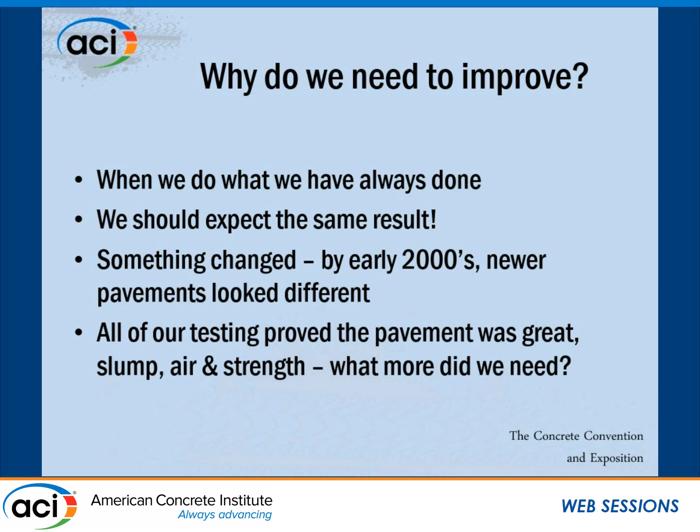Every slump test was in spec, every air test was in spec, and man, we nailed strength. We were 50% higher on strength on every single sublot. So we knew we had good concrete, right? What more do we really need? 2 or 3 years into the life of a pavement, we were starting to see these shadows develop. And we were going, what's going on here?

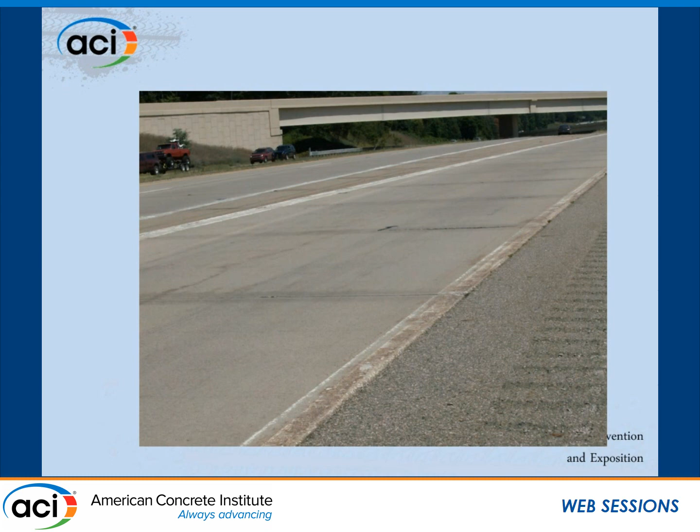What's happening? When I was traveling about a week ago, I was down in Orlando, and I noticed at Orlando Airport the same kind of shadows going on, okay? Now, obviously, in Orlando, they don't have the same problems we have in Michigan because there's something they don't have down in Orlando that we have here. It's a 4-letter word called snow.

But notice the shadowing on this joint versus the shadowing on this part of the joint. Why is it different? Well, a couple of reasons, but the main thing is this was probably a slip form pavement, and that was done by hand. So that just gives you a little tickler to think about as we go forward here.

So what's changed? Everybody talks about the EPA restrictions on the cement. New admixtures. We came up with these things called synthetic admixtures, so we can blame them for all of the problems in the world. A big one, the snow and ice policy changed. The departments and the local agencies went to a zero tolerance for ice and snow, so they started pre-treating, and these guys came out of the woodwork with some really neat, cool stuff.

Some brines out of the salt, out of the oil wells, and they would treat pavements on Friday on regular time because it was going to snow on Sunday on overtime. So they would pre-treat the pavements. So we were really trying new policies here. Cement fineness. Something's going on with the cement. We're getting 28-day strengths in less than 24 hours at times, okay? So we're really accelerating this process.

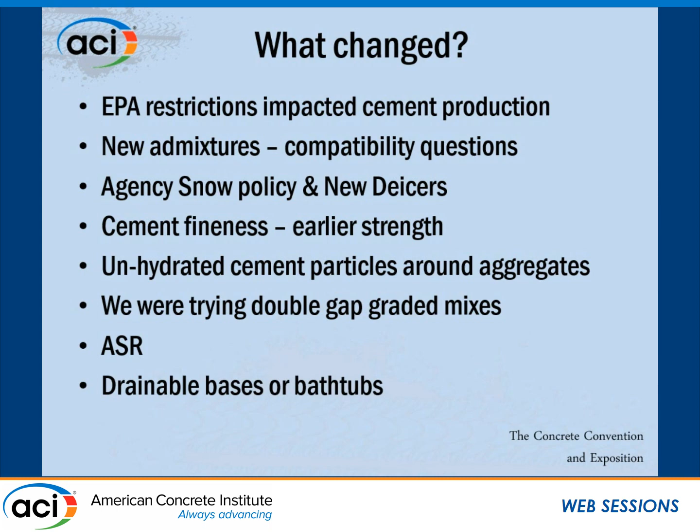We find in our reports unhydrated cement particles surrounding the aggregates. We are trying double gap graded mixes, right? Throw in some cyclopean aggregate so we don't have to use as much paste. ASR, that was a big buzzword. So we've realized that ASR did exist. And then we had drainable bases, we were making drainable base pavements. But were we really creating bathtubs to soak our concrete in, or did we really drain our pavements?

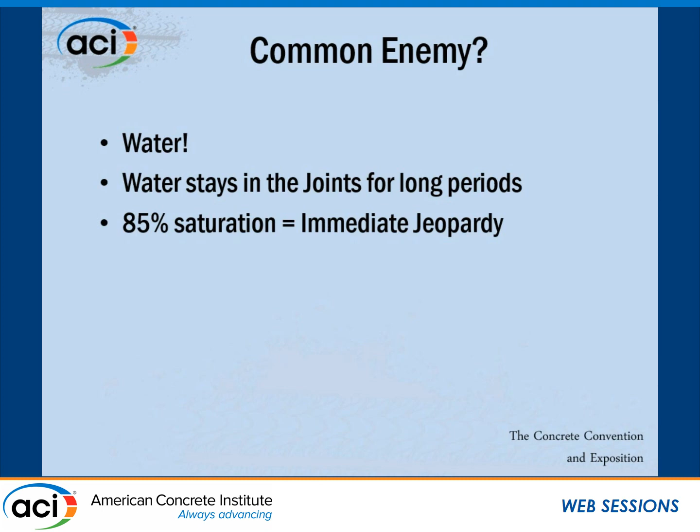So the common enemy that we have here in Michigan is water. It's our greatest asset, but our worst enemy. Water stays in the joints for long periods of time. And when we get to 85% saturation of the pavement slab itself, Jason Weiss, formerly of Purdue, now of Oregon State, has showed us that one freeze-thaw cycle gives you instant damage once you reach that saturation point.

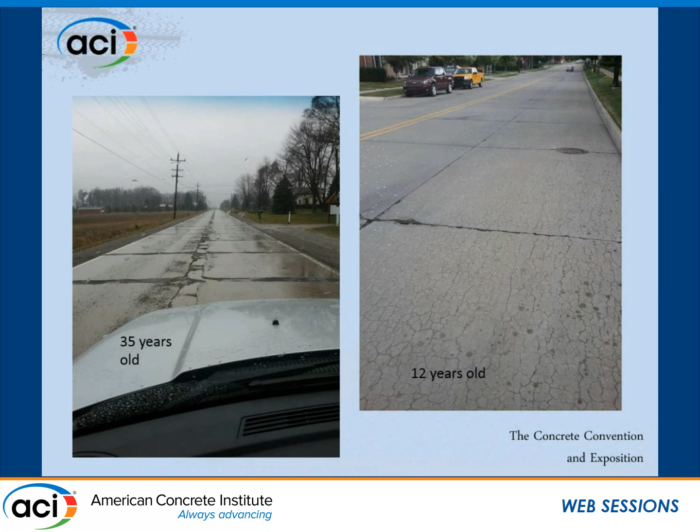So here's some pavements 35 years old, and all of a sudden, over the course of a couple of years, it goes south. Here's a pavement in Dearborn, not far from here, where we actually do have ASR. ASR shows up in about 12 to 14 years. This one was 35 years old, but we got some newer pavements that after 5 or 6 years look like that. So I ask you, what is missing? Take a look at this photograph, you can see the aggregates there.

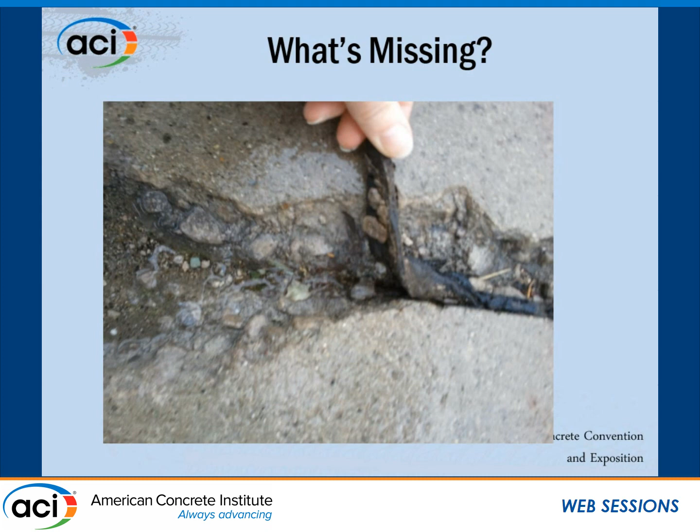It's kind of sticking out of the pavement like a sore thumb. So what's missing is the paste. We've lost the glue. So the path to today: how do we get here, where are we, and what have we done? There was a petrographer that worked for MDOT nicknamed Rocky.

And in 1997, Rocky did a report, and he identified calcium hydroxide depletion as one of the things that's happening. Near the joints, when you make concrete, part of the byproduct of the cement hydration process is a byproduct called chalk, CH, calcium hydroxide. That is water soluble. So where you have water, that chalk can dissolve and flush out of the system, and that's why we see the shadowing.

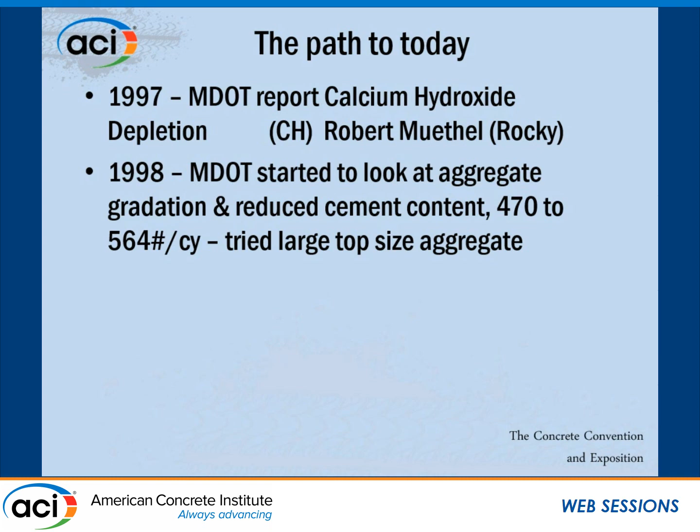In '98, they also started going to reduce cement paste by using bigger aggregate, but what they did is they tried to go with a big ag. That created a problem where we had to highly vibrate our concretes, and created a problem with our air systems. Larry Sutter up at Michigan Tech did a study for South Dakota, from about 2002 to 2008, looking into the de-icer issues.

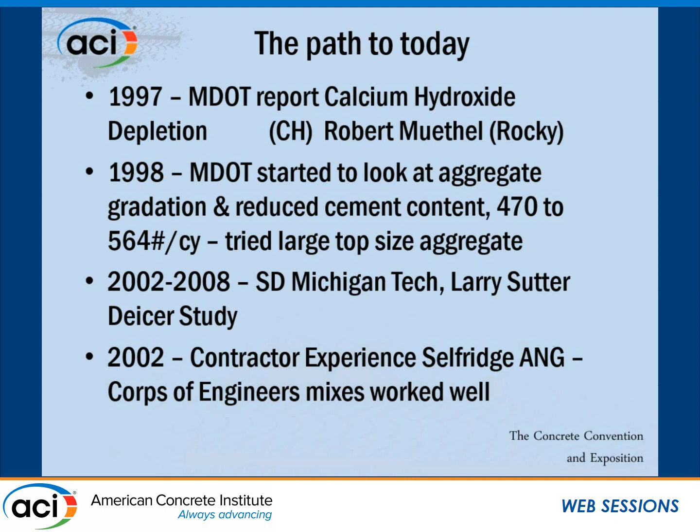And a neat thing happened to us in the industry: one of our contractors had to do a job here at Selfridge Air National Guard Base on the north side of Detroit. They had to use a Corps of Engineers spec, and the Corps of Engineers had gone into these well-graded mixes earlier than most of the DOTs did. So they had some experiences, and they found out this is a pretty neat way to make concrete.

So the path to today started in 2002, 2004. We started experimenting with the state on Jim Shilstone's well-graded mixes idea. Jim's idea had finally come to fruition here. In 2005, our contractors purchased an air void analyzer, a $50,000 piece of equipment. But what they found out was that batching practices matter. It's not a great QA tool, but you could see how making minor changes in how you batch the concrete could make a significant change in the air void system. How we operate makes a difference.

In 2005, we actually moved it into the ready mix world. So we had some ready mix guys using these well-graded mixes, and those mixes are doing very well. We also said, enough is enough, we've heard enough. We went and hired the National Concrete Pavement Technology Center. Jim Grove was the principal investigator for us, and they did some investigating with three of the local counties here that donated cores and experimental materials. They came back to us and said, Houston, you have a problem.

Now, when I inherited the job of director at the Michigan Concrete Paving Association, about the first day I came on the job, we got this report back. And I said, you know what, I can't go to my customers and give them a report that says you have a problem. So what we did was produce a recommended specification for the local agencies to use that would solve these problems, we thought, going forward.

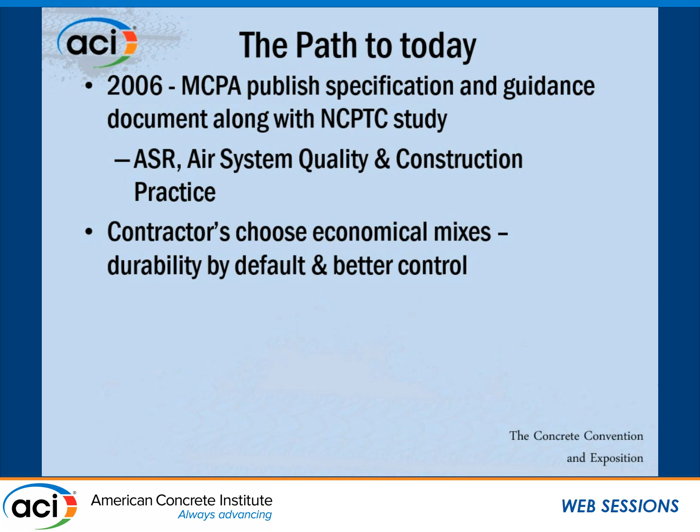The contractors now started choosing a durable mix by default, because they ended up with better control. So as an option, many of our contractors started using what we call a very durable, well-graded mix with SCMs in it, where we check the air system before and after the paver. So just by economics, we started doing this stuff.

We got into stockpile training because moisture in the aggregate is a key ingredient to the construction practice. How the loader operators handle the materials and maintain the gradation was a key part of what we found out. It's all teamwork. In 2012, MDOT updated their spec book and they pulled out the section that said October 15th, fly ash and SCMs go away. Jason Weiss was talking with me at one of the meetings.

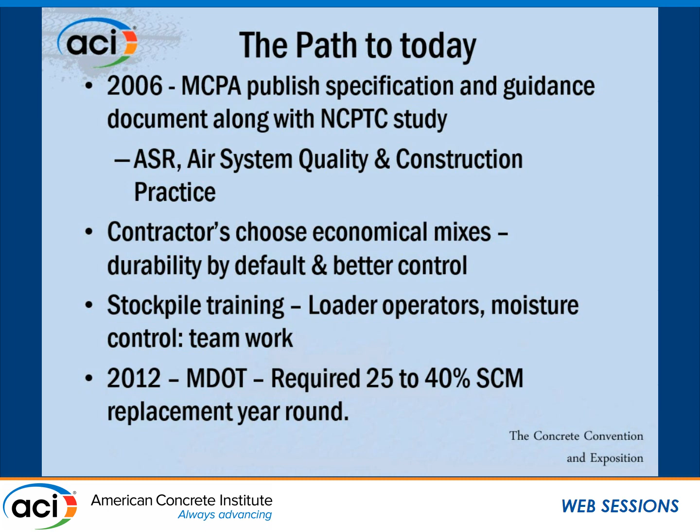He says, I just wish I could find a state that required it year-round. And I said, it's already done. We've been doing it. What the contractors have to do nowadays is use a boiler in the fall at their portable batch plants so they can keep their mix temperature around 70 degrees. At 70-degree mix temperature, the SCMs don't slow the mix down that badly. If you try to batch with SCMs in this climate, in 50-degree weather, 40-degree weather, you're going to have problems. But we have learned how to deal with this.

So where are we headed? The legislature got involved in the funding of highways in Michigan last year. And now they are the world's experts at designing and constructing pavements. So that could be coming to a state near you too. But they put a requirement in that MDOT now start doing some demonstration projects with a 30-year and a 50-year design life. Most of the standard DOTs designed for about 20 years.

So they required this. And what we're taking advantage of now, we know we can make good concrete, but can we build a good base to put concrete on? So it's a whole complete system. So we're working more on the bases than we are on the concrete because we think we're pretty much there on our concrete.

New test procedures, right? How long have we been measuring slump? How long have we been measuring total air content? And how long have we been measuring strength? And is there anybody in this room that thinks those three properties are the only thing we need to know? So we're getting into some new tests. SAM, Tyler Ley's Super Air Meter. That is going to be required on many of the projects in Michigan starting this year.

The DOT has purchased 7 of those meters in the last month, and the contractors are going to be using it. We're going to use it as a quality control tool for the first year or two until we develop enough data to set a specification limit. But we are hoping that this Super Air Meter will help us identify not only the amount of air, but the quality of that air system.

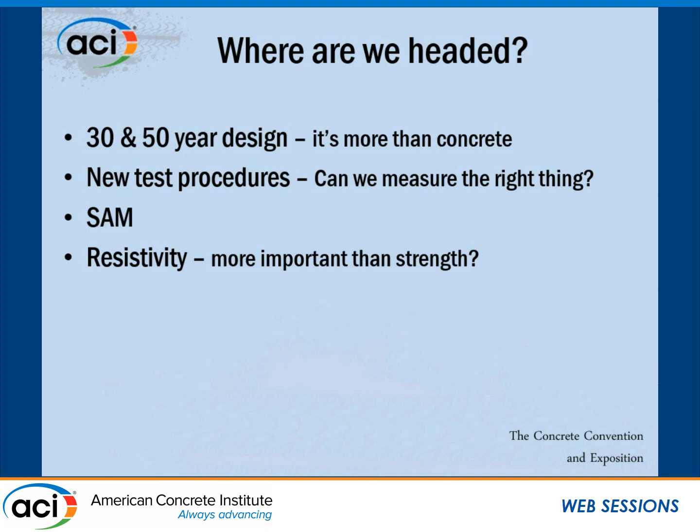And what we found in Michigan on some testing we've done as an association is a huge difference between 2 different aggregate sources on the number that we get out of the resistivity. But we've got to be measuring something more than just total air content and strength.

We're going to use cure as a pay item this year. We're going to measure the timeliness of the application. We're going to measure the quantity of the cure applied, and we're going to have a measure of the uniformity. You know, with curing as a miscellaneous incidental item, nobody goes back and watches the cure guy. As long as it gets painted white before the end of the day, everybody's happy. But now we're going to be putting a lot more attention and detail to it as well.

Joint cutting and cleaning and curing practices. When I got in the paving business 40 years ago, we would saw a joint and we'd leave the slurry there. And you could get out of your pickup truck a week later and slip and fall on that slurry because it was pretty wet and damp. What do we do today? Because of all the environmental dust regulations, we saw a joint that night, we flush it down and clean all that slurry off the slab immediately. We no longer have that curing of the joint saw cut any longer. Maybe that's part of our problem. And now Larry Sutter's been working on this, and so is Jason Weiss.

Sealers. Do we need to start sealing, waterproofing? I mean, you buy a new pair of work boots, you put mink oil on it to keep that leather from getting soaked up with water and debris. Are we at the point where we start needing to treat those interior faces of our joints before we apply the sealant? That's some of the places that we're still ready to head to.

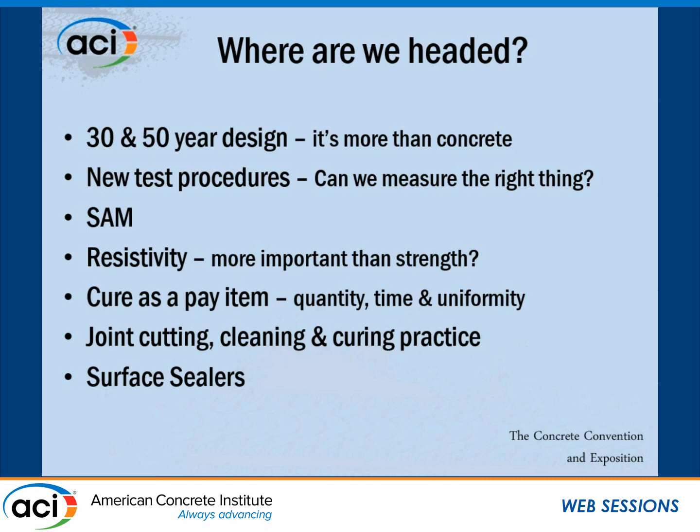The rest of these speakers are going to be telling us a lot more detail about what we were seeing here. But I will tell you, this is a piece of pavement that was built 14 years ago now. We don't see any joint staining. That same contractor built a project out of the same batch plant site with the same mix design, with one exception, that they used straight cement and not an SCM. The same admix, the same aggregate, the same sand, same plant, the same operation.

This summer we are going to replace about 6 miles of that freeway pavement that was made with straight cement. ASR was a problem we tried to solve, and maybe the salt attack was even a bigger thing that we didn't even know about, but the solution was kind of the same. SCMs, supplemental cements, is there, and the other big thing that we've done is we've really worked on the quality of the air system and not just the total air content. So that's where we are today.

That kind of sets the stage for the stuff that Peter and Tom and Rick and Mark are going to be talking about coming forward. So, any questions for Dan? Yeah.

What MDOT has been trying is some 100% siloxane sealers. 100% product. 40% doesn't seem to make the big difference, but 100% sealer does. We've also tried some of the soybean oils or some of the bean oils that are out there.